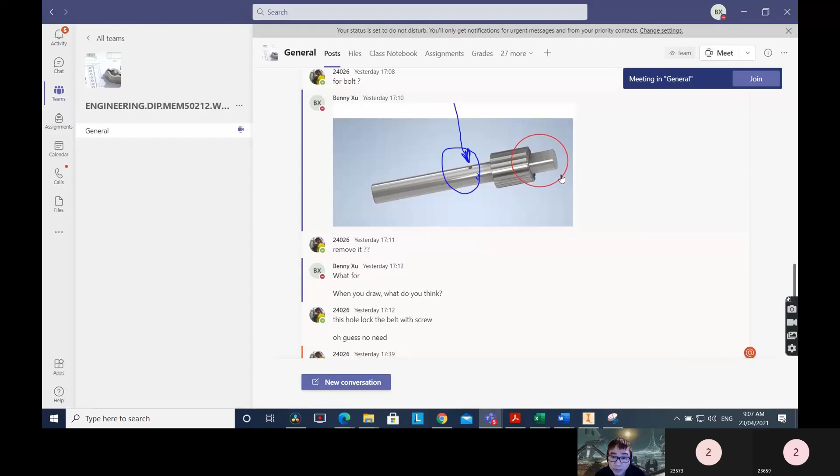Okay, good morning all. Yesterday, one of the students finished the shaft. Bob already started drawing the shaft for the treadmill.

So on the treadmill here, there are two different shafts, this one and this one. These are two important parts to drive the belt on top. Without this, the belt won't turn. This is a flat surface and there's a smaller surface here, so you can insert the tooth here, and also put the bearings on. Same as this one, you've got the cog wheel for the gear, and the motor is here, which drives the gear so they can turn. This one and this one must be the same size.

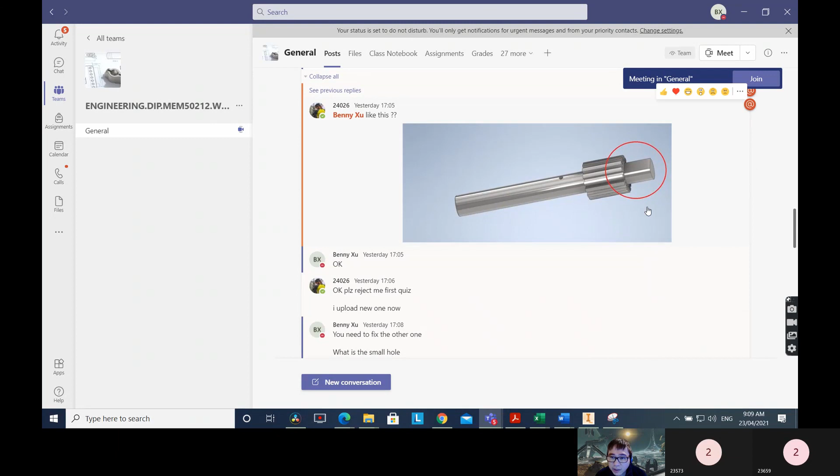That's the first drawing. That's all incorrect. I think there's a lot of problem with this drawing. I gave a little bit of instruction and came out with this, but this one looks like different sizes.

As I said before, the surface here must be the same size. On the side there, you don't need a screw because the bearing will cover here to hold both sides. If you don't have this groove, you can have the same sizes. However, if the same size is a little bit difficult for you to lock in the bearing, by shaking, this shaft can move out and it's also not easy to make an adjustment. If you put a screw here and tighten it, the shaft won't turn. Same as here, there's nothing like these two ends here. The other problem is I think this is not wide enough, or this is too much.

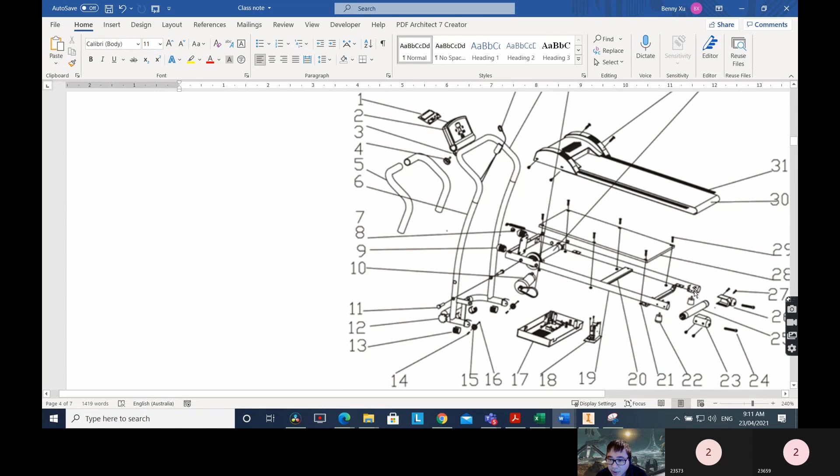Let's come back to here. So if I identify the sizes between here and there, maybe from this groove to there is, for example, 500. Based on this information, I'm going to make a drawing.

So standard, create, and then I start the 2D drawing. Doesn't matter which plane you use. First thing I do is the raw size. Come back to the raw size, I'll say 50 mil. So when I turn green, I type in 50 mil.

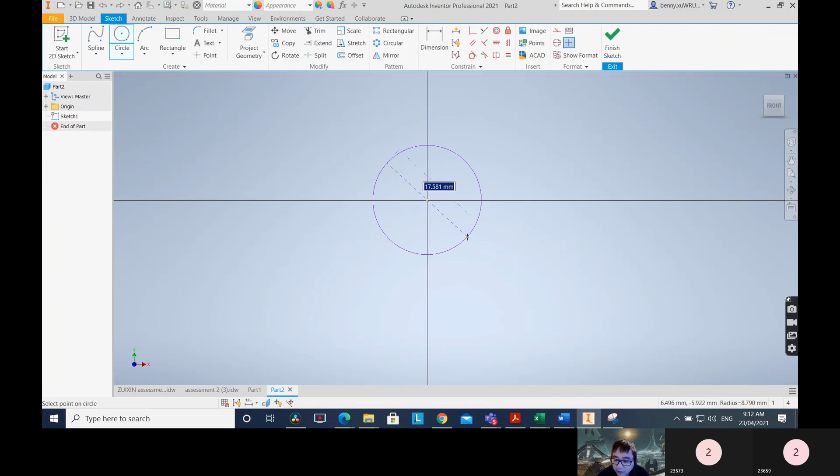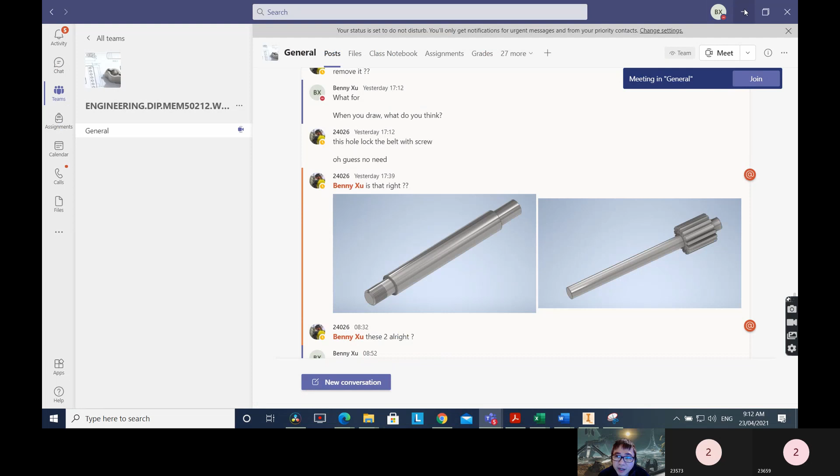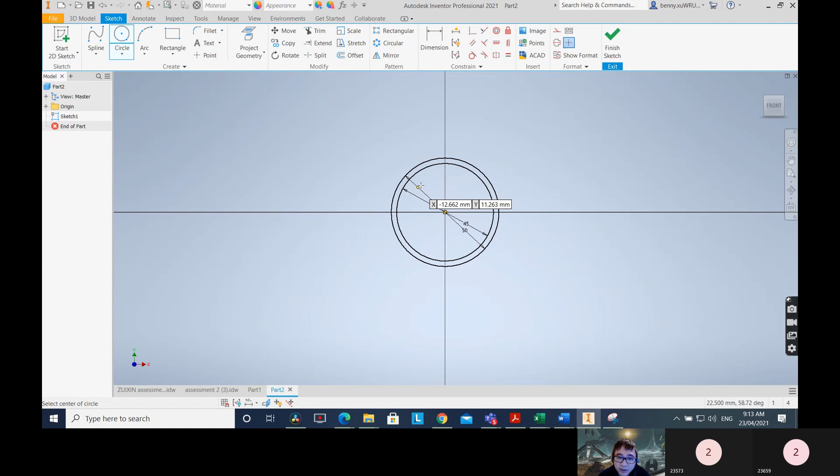So the second one, let's talk about this part. I would like to say 45 mil. So 45 mil means this one is 2.5 mil. It's okay, clip in the bearing. How big the bearing is, we need to work out. The internal size of the bearing is 45, so you can put it in. Okay, so I finished my drawing.

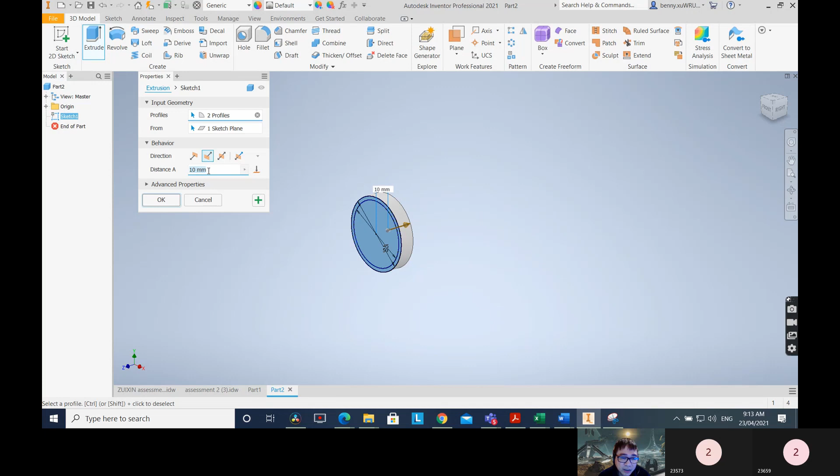So extrude. Okay, I would like to go the other side. How far do I need to go? At the moment it's 10 mil. As I said before, I want 500 mil, so I put in 500. Okay, so that's 500 mil, crossing over from one end to the other end. That's not the size we clip in the frame. Remember, we don't have the surface there.

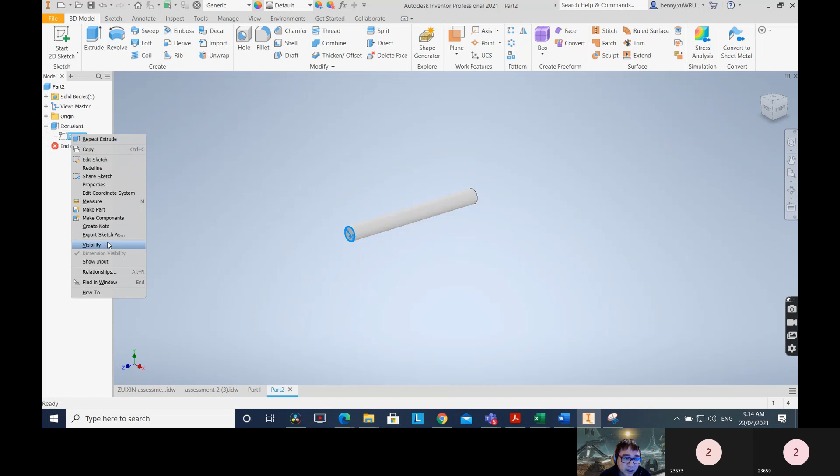So I would like to do right hand click, I want it visible. All right, so I can see it. Okay, now extrude, and this one now, I would say 30 mil. And okay, so 30 mil. And I would say that's, I finished one side.

Let's come back here. As I mentioned before, that's a driving shaft. Driving shaft, there's no power needed. So when the belt turns, it's just turning. When you have a car, we say two-wheel drive, you only drive the front shaft. The rear shaft just slaves, they're just running. So therefore, you don't need any gear.

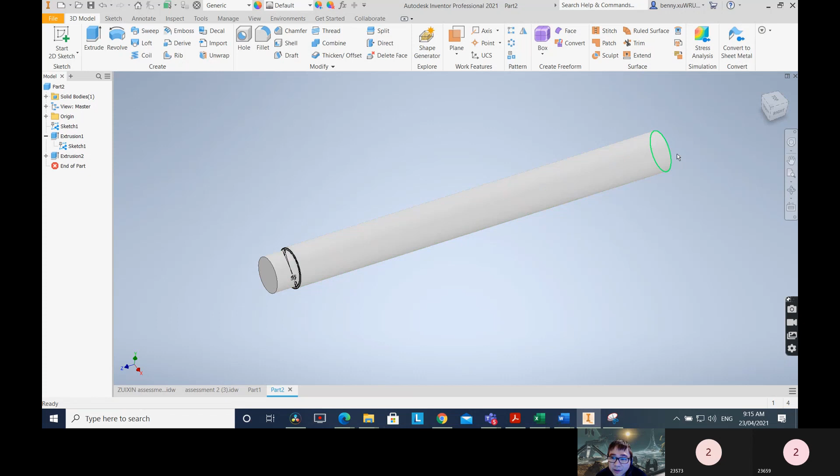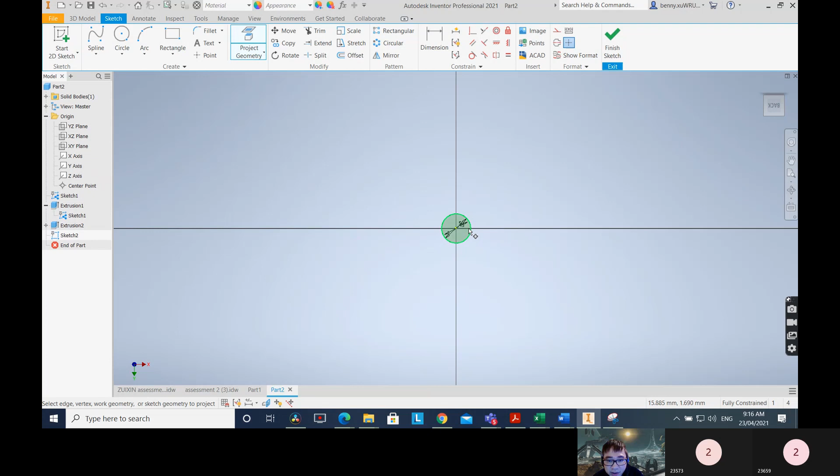But both sides need to attach to a bearing. I don't have the other side, the shaft for the bearing. I just get sketch. So now if I turn around, I can see it right there. That's okay if upside down. So I got Project Geometry. I highlight this one, and also I highlight this one.

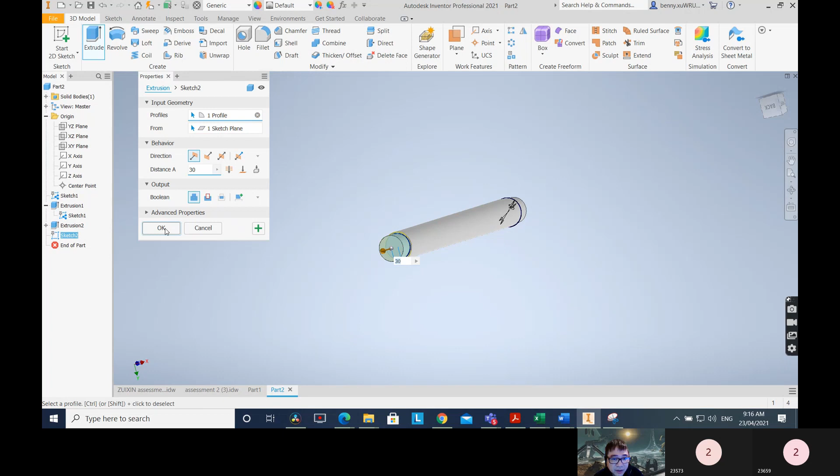And then I get through a circle to there. All right, finish. It's okay, and finish. Extrude this part, 30. I got both sides now. It looks good to me. There's no problem at all. That's the driving part.

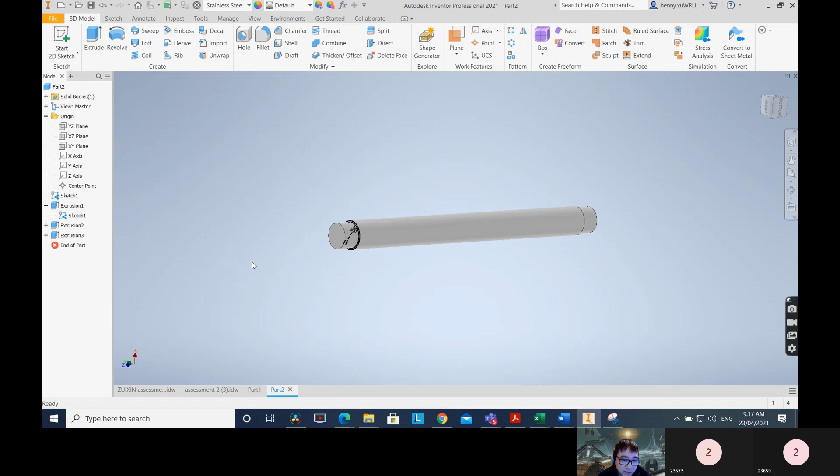I already finished. If I want to select the material, I would like to select the one with no rust, no plastic, no PVC, no polyester. Maybe polyester is okay, but it's very easy to wear out. So you can choose stainless steel. If I want to do stainless steel, I just pull stainless steel. Yeah, it never rusts and is strong enough to hold everything.

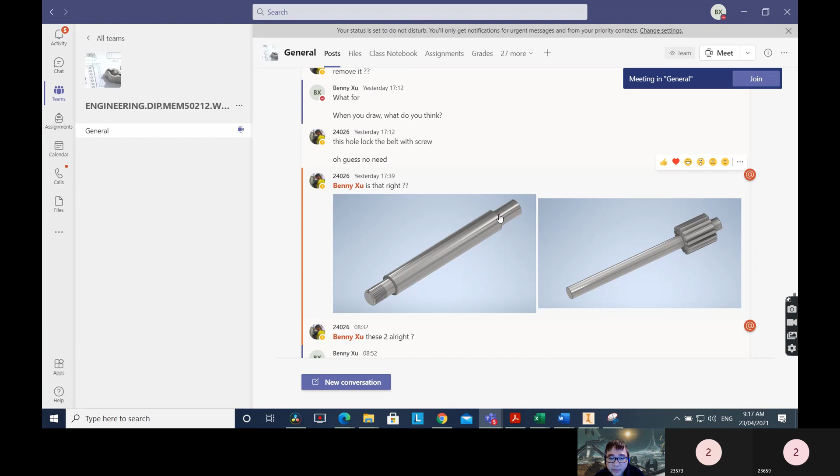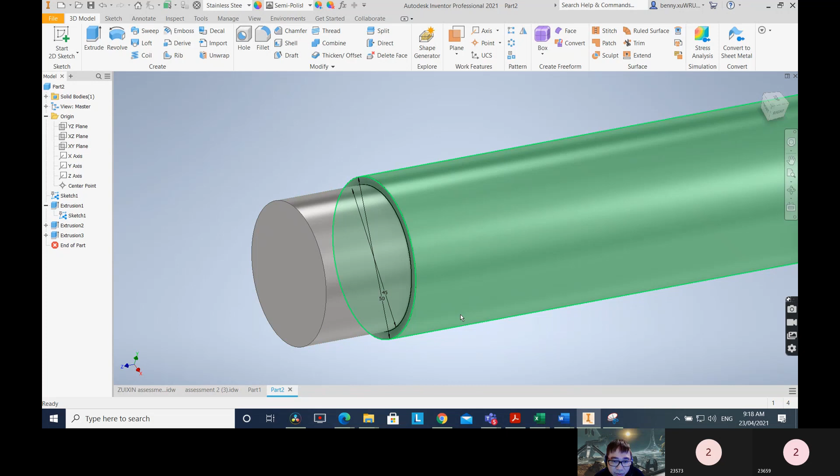So this should be the one Bob was just showing here, this one there. You don't need this, you only need these longer parts as a shaft. In case some people say I want to put a bearing there but I still need to lock it in, I don't want to lose this one, so they move in and out or whatever. If you don't put it right in the corner there, it will lose out. So you can put a pinhole there and insert a pin in there. You can do it, not necessarily saying I don't need it.

The sharp edges, so I can use the fillet. This is only 2.5 mil, so just be careful. Maybe I change the size to 1 mil. That's 1 mil, and then 1 mil there.

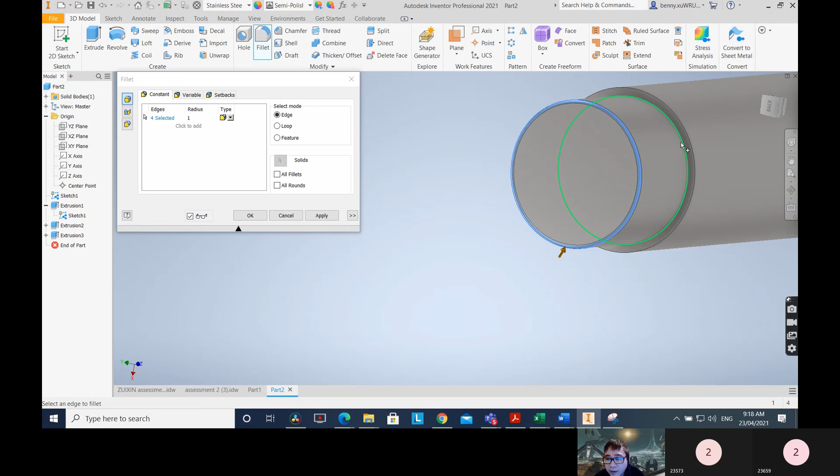And all around, just be careful. This is not big enough if you put too big.

Okay, so that's the finished product. That's how they look like. So this one's a driver shaft. How do we make the driver shaft?

That's why I mentioned before, you need to have a cog wheels, you need to have a gear to be driven by the motor.

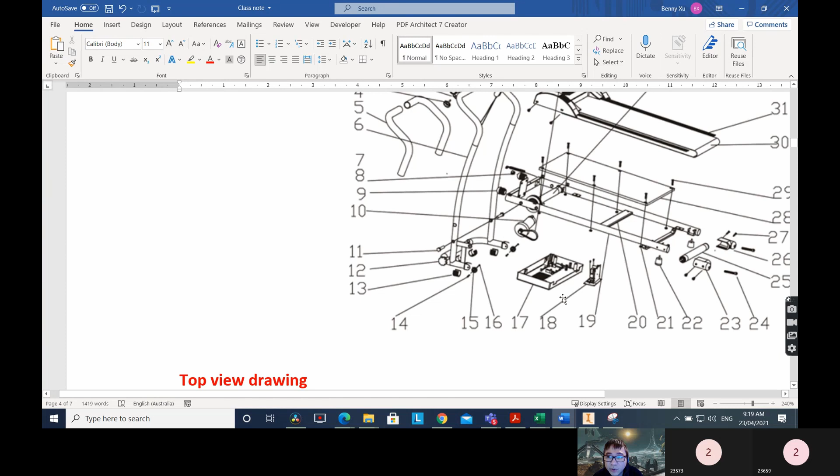Save as. I just put in the documents, driven shaft. Okay, I saved this one. Already been saved. So what I'm doing is I can modify this.

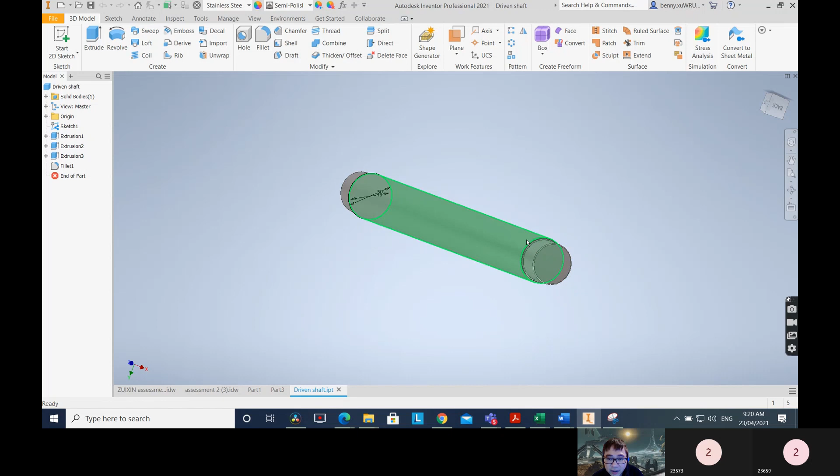The only difference is I'm going to put a gear in here, right in the corner here. So between here to there is 30 mil. Remember, offset, get this one, and then I get.

You see the arrows here is pointing to this way. So I put minus 30 and enter. So the surface going there.

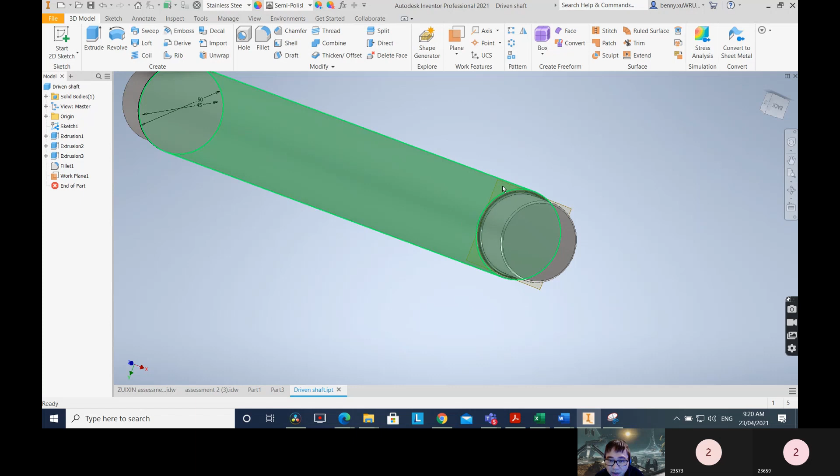So what I'm doing now is go to sketch, perfect, right, and go to do the project geometry. This one.

The reason we can do this is because we don't know which one we're going to use. We don't have any figures.

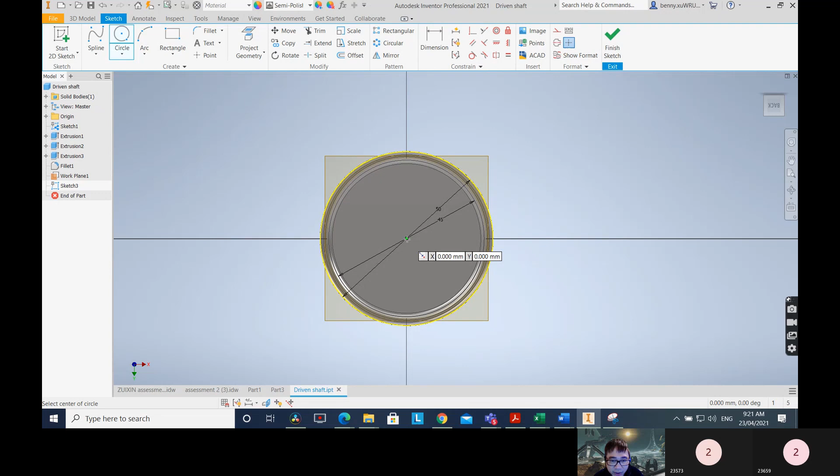So if I come to the center point there, it turns green, and then I make it because the gear must be bigger than the flat surface of the shaft. So therefore I put 60, maybe.

Again, I don't have any sizes, that's why I'm not going to do exactly what I want. And then draw a line there.

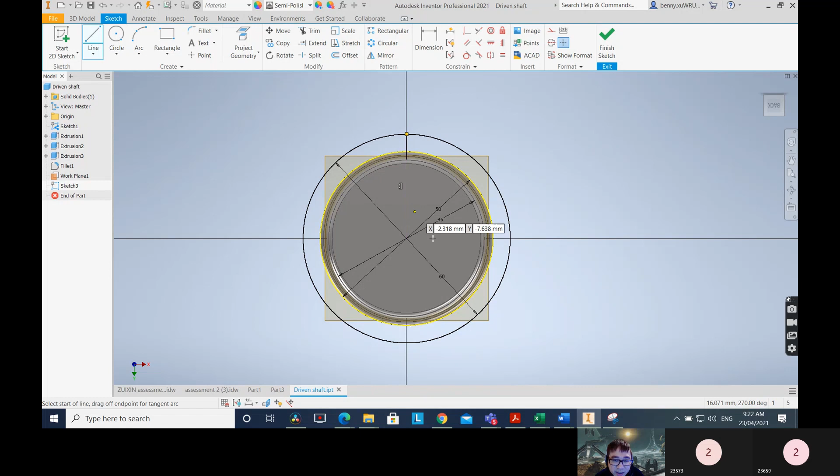Okay, you won't see it. You don't see the lines there. You see the lines there. Why? Because you're drawing on this surface.

I don't want to turn this one off. I can't turn it off. However, I just keep going like this because the only parts we need is in here.

All right, okay, draw another line. And this time there, this is 90 degree. If I turn to here, you're getting a little bit bigger.

So 104.88 degree, or 100. So what I want to do is I put 98. So tab 98. All right, so I have another one.

Okay, so now I'm going to draw another one. I need another one, so I need 3 points. The gear started from here to there.

Yeah, I need a little bit of curve. So that's a start point. That's the end point there.

Okay, so let's draw another line. And at this time, the line roughly in there. So I put 93.

What I'm doing is use the arc, 3 points arc. I can use maybe this point, and this one. There, here, and here. You see the half circle, doesn't really matter.

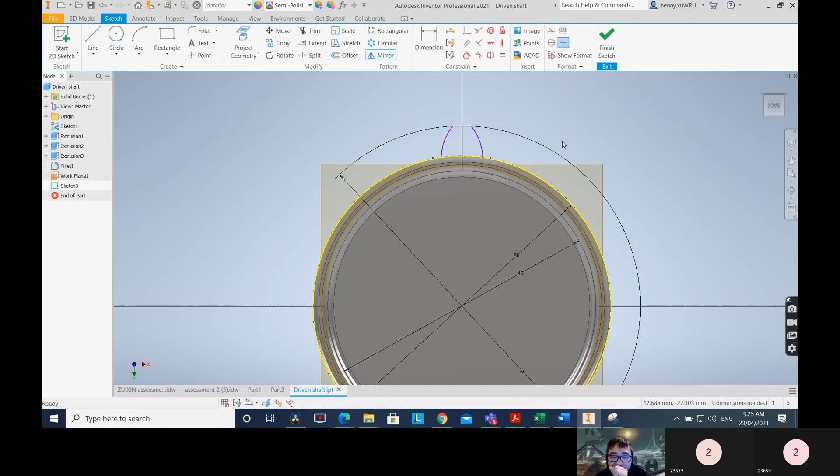And mirror line is this one. Apply to go in there. All right, done. I'm just drawing this one.

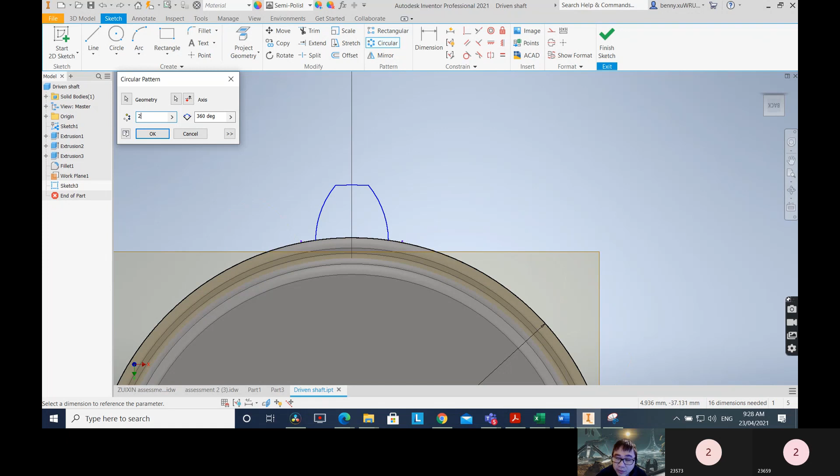Circular. Let's select all these again, and select the axis, and then I put 18, or I put a little bit more, 20. Oh, 20 is good.

It has been created, so I'm happy with these results. I'm going to close this sketch.

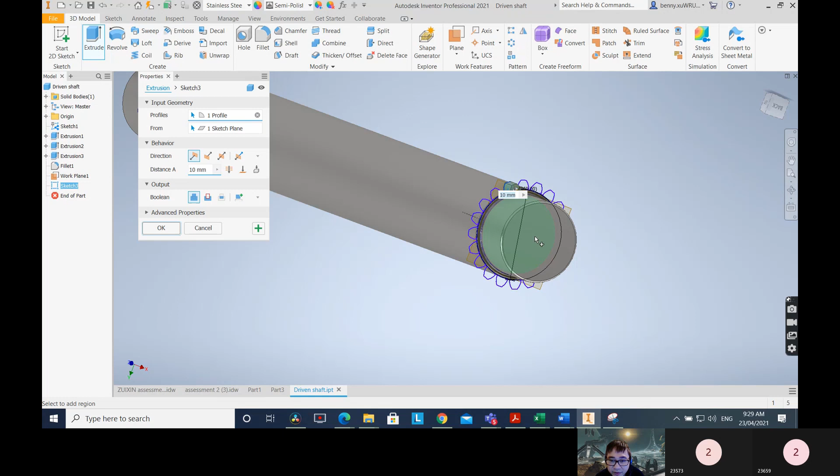So extrude, can extrude this one. Let's say 10 mil, 10 mils are good. But the other way, you don't want to interfere with this side because they overhang. They overhang. Okay, go to the other side.

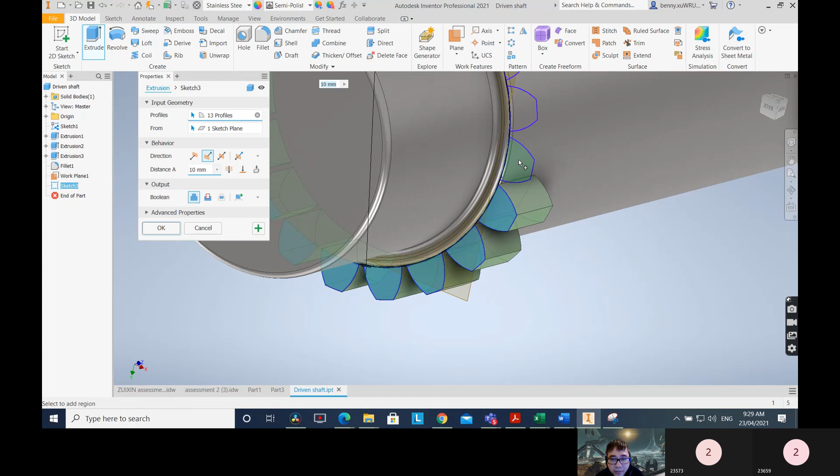All right, all done. Okay, so now it has been done. It is good results.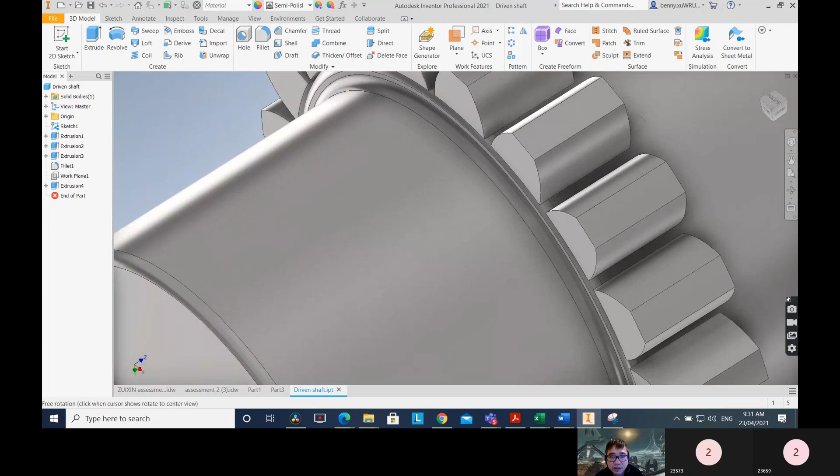You can always drive this shaft. So that's a finished product. If I try to turn this, I can turn it. So the shaft is turning by the motor.

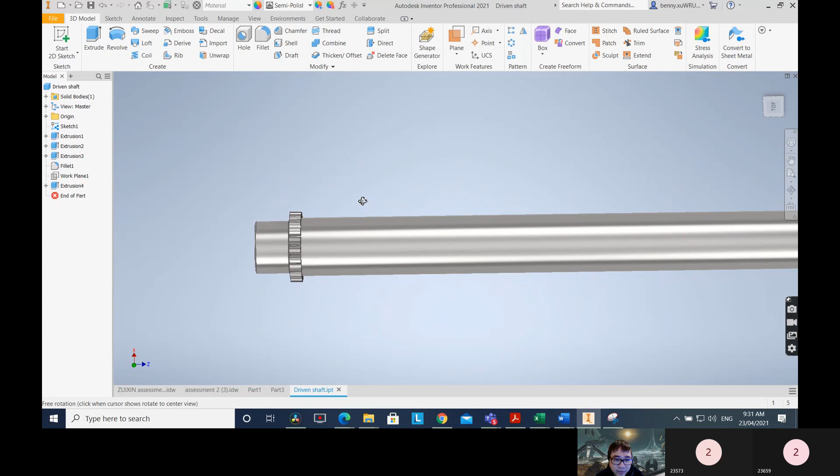And you put the bearing here and put the bearing here. And some people say, I want to lock the bearing in, so I make a little hole there and put a screw in.

Go to save as. Before I said driven shaft, now I put it in driver shaft. So I got two different ones.

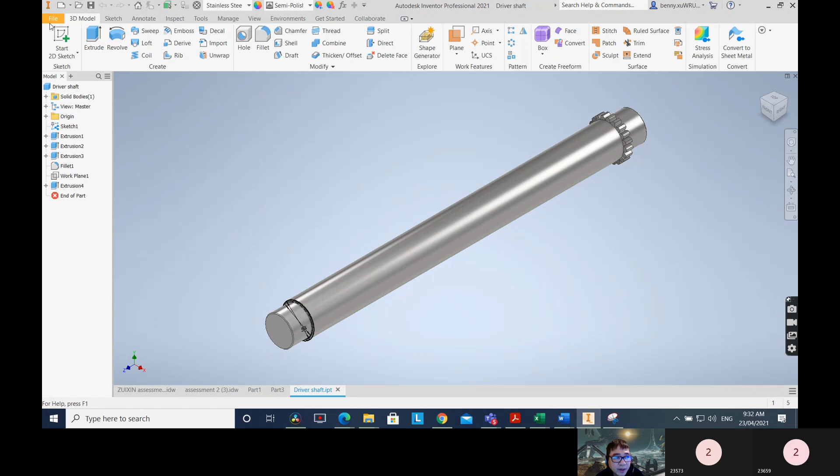All right, if I want to create assembly drawing, and then I can place some of the drawings I created.

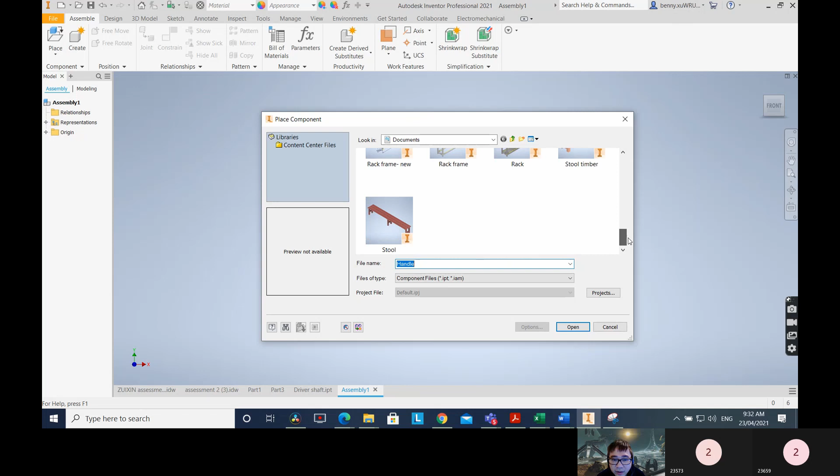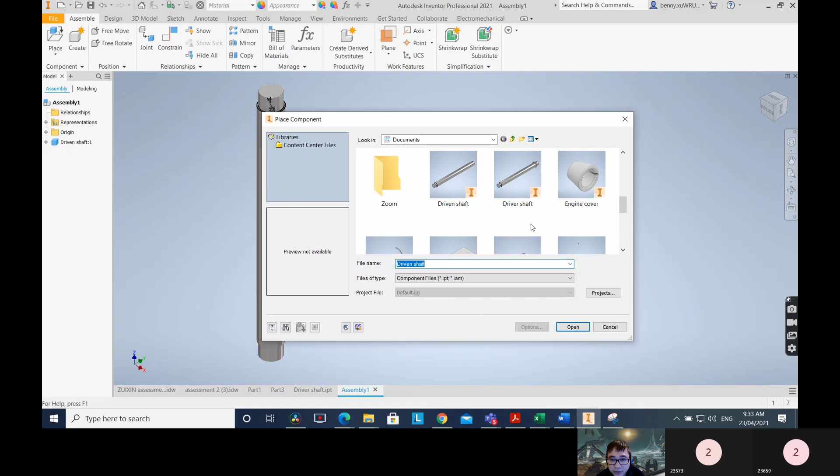Okay, and open the other one. This is driven, so I'm looking for driver now. Okay, so 2 of them.

So now we've got 2. If you put the belt on and the cover on the side, bearing, motor in here, it will be the power for your treadmill.